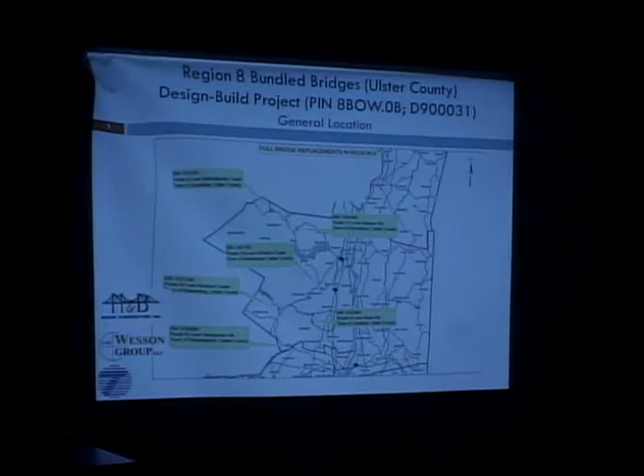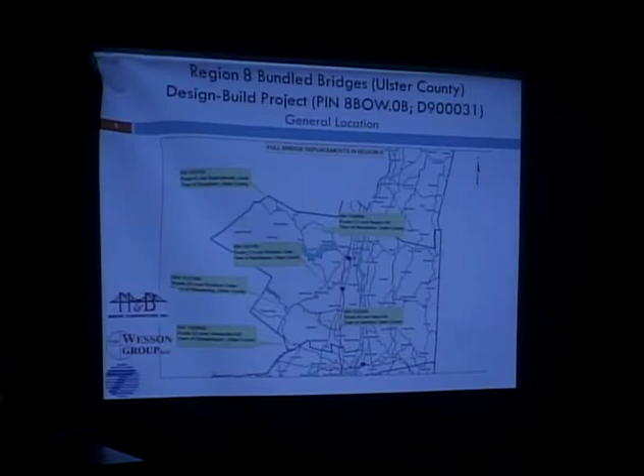You're right. Are you ready to start? Everybody ready? Yeah, we're ready. With the technology over this, there. Where should we stand, over here? You all right with the wire? Let me just, where do you need to go? Put that down.

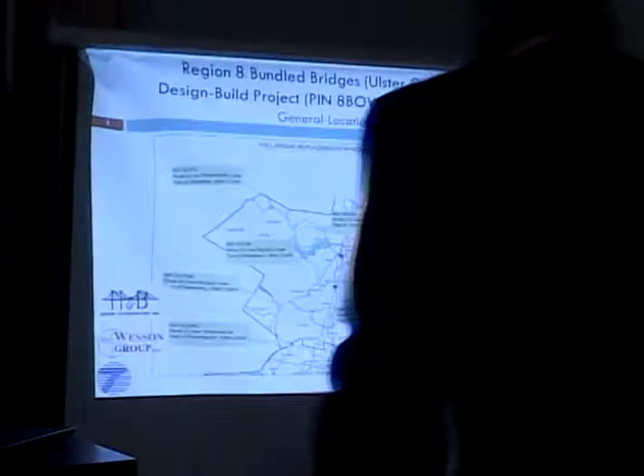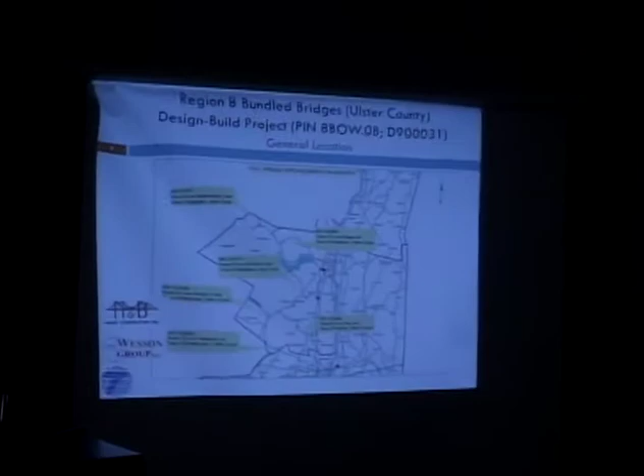All right, thank you everybody for coming to a short presentation about the project bridge replacement that we have going on.

In the town of Shandaken, very shortly here. My name is Paul Tierms, I'm with New York State Department of Transportation, and I am the project manager for the state on this project.

This project is a new type of contract, a new venture for New York State. Most of the contracts in the past, we have control over design. We put them out for low bid, and then we perform all the construction, inspection, and the quality assurance of the project.

This new type of project is a design-build project, where we put together a proposal of requirements for the bridge replacement - all requirements we want to be met in the design and the construction, from bridge design qualifications to work zone traffic control restrictions, and any special comments we've gotten in our initial public outreach from the community.

Then we put the proposal out to be proposed on, and we get one design builder, a contractor combination with a design firm and a construction inspection firm that provide all the services for New York State Department of Transportation. And they design the project, build the project, and they oversee their quality control over the project.

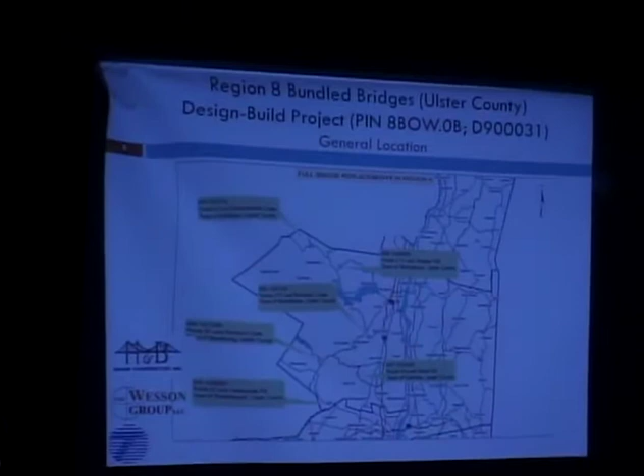It consists of 6 locations in Ulster County. Shandaken, in the upper northwest corner, is the one extreme, all the way to Pine Bush at the southern edge of Ulster County. So throughout the course of the next 18 months, we'll be reconstructing 6 bridges.

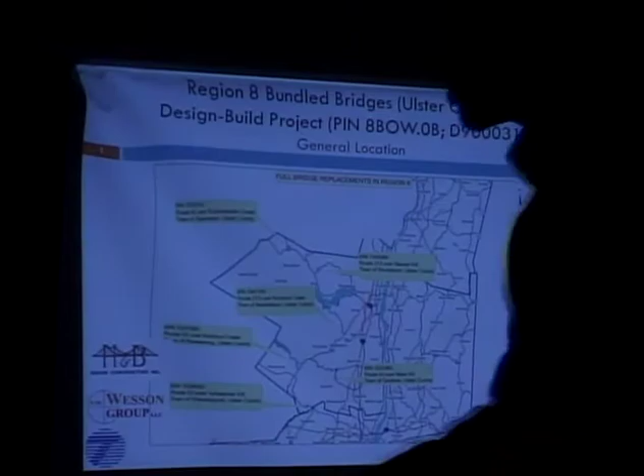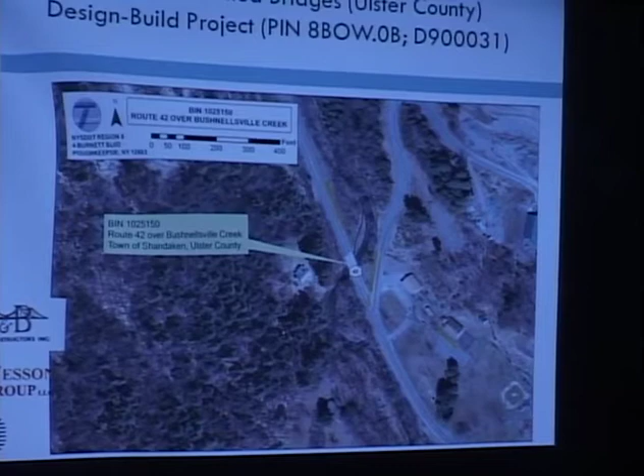So the first location happens to be here in Shandaken. It's Route 42 over Bushnellville Creek, just north of the 28 and 42 intersection, near the police department garage and the other town facilities.

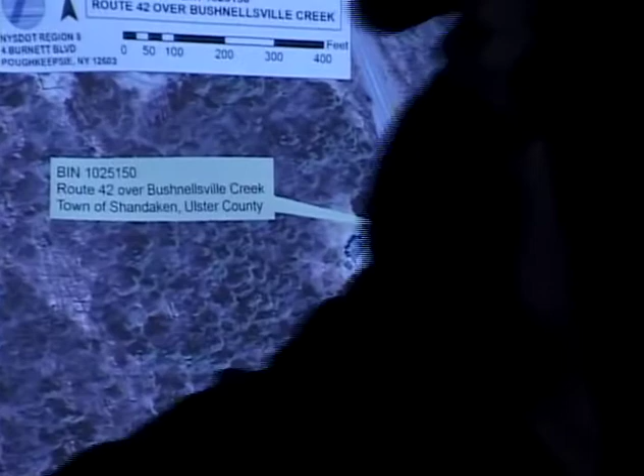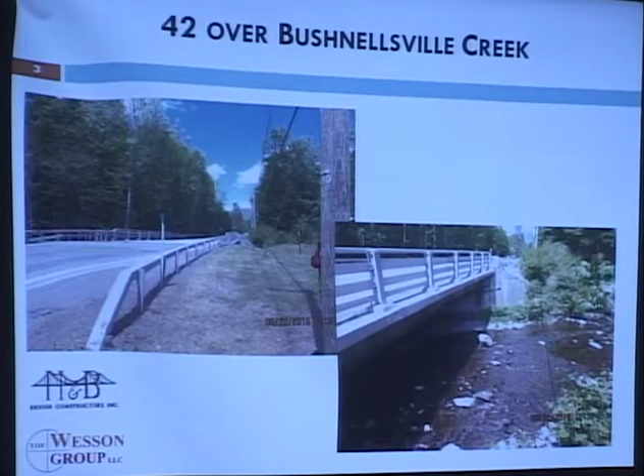So right now it's just sort of a plain Jane, vanilla fudge bridge. The state has identified these structures that may have problems in the future with scour-prone foundations, so this is on that list of so-called critical bridges over water. The plan is to replace the bridge in kind on its existing alignment, maybe with a little bit of higher elevation and a wider waterway opening to address the flooding concerns and erosion issues around the existing bridge.

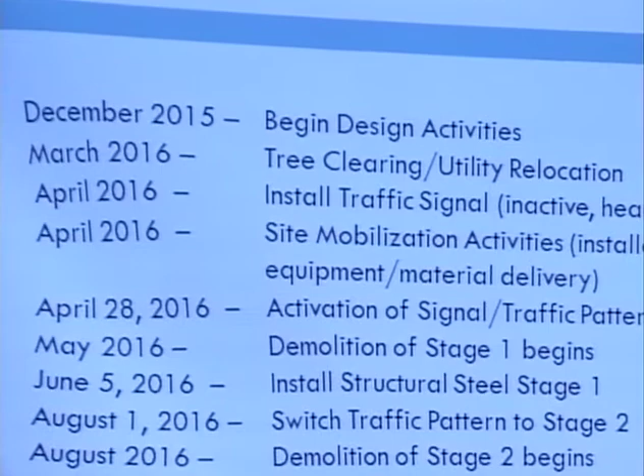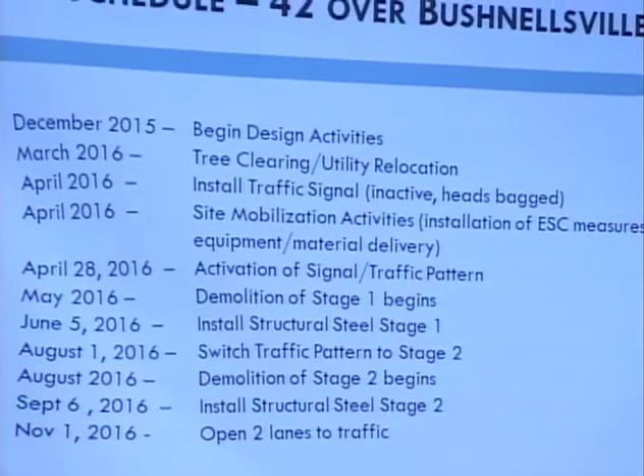As far as our schedule goes, we were awarded the project in December, so right away we had to begin our design activities. It's a design-build project, so there were no plans, so designing the new bridge and the roadway was the first task. In March, we started some tree clearing - you probably saw some of that activity going on - and utilities relocated to get themselves out of the way.

The next piece of activity you'll see in April, towards the end of the month, will be the installation of a traffic signal. That will be part of our work zone plan. We'll have an alternating one-way traffic pattern. You'll see the signal go up, and for the first couple of weeks, the heads will be covered up. They'll be bagged until we determine it's okay to put them in operation.

Also in April, there'll be some other site mobilization activities. We'll be moving some equipment in, doing erosion and sediment control device installation, bringing some materials in. Then the plan is on the 28th of April, we'd activate the signal, and that would control traffic.

in a one lane alternating direction pattern. Once the road is closed, we would demolish half of the bridge at a time. What's now the western half of the bridge will be removed and replaced first. That activity will start in May. Sometime in June, new structural steel will arrive and we'll continue on.

By the 1st of August, we should have the first half done, and we'll switch the traffic pattern so you'll drive on the new part and we'll do the second half, more or less the same procedure. Structural steel will come in September. The plan is that by the 1st of November, we'd be open back up to 2 lanes of traffic.

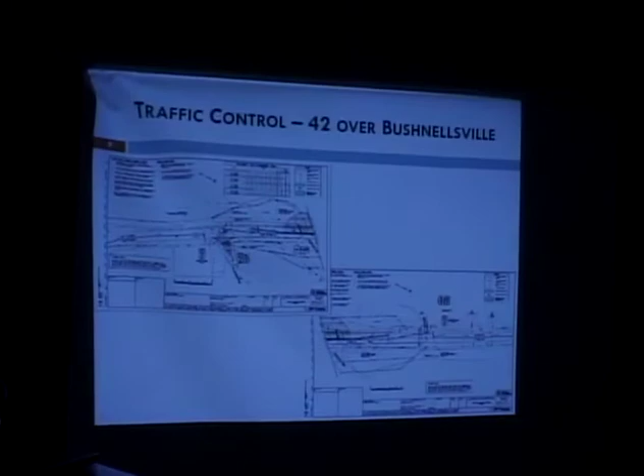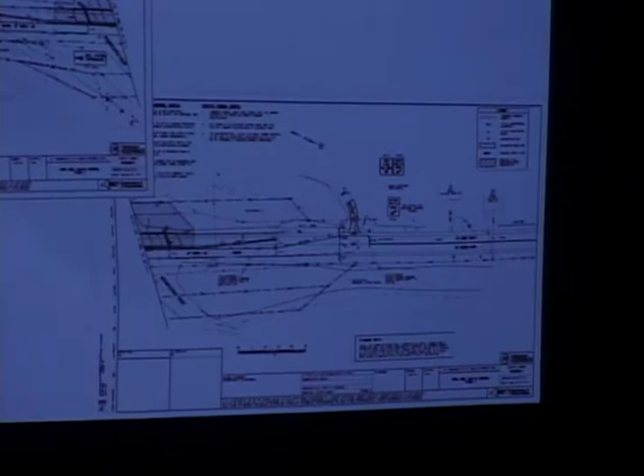As far as traffic control, it's going to be a signalized one lane, two direction arrangement. So you wait, the signal will give you a green light. We've got a couple of driveways there, one to the town facility that will have its own signal face. If you're in there trying to get out, there'll be a detector that'll give you a green light to advance. Similarly, on the north side, there's a driveway right where our signal is, so those people will have either a push button or a detector, so they'll get a signal phase to proceed.

One of the things we're doing as part of this design build process is a lot of public outreach that is normally not done on these kinds of projects. To date, we've had a stakeholder meeting where we met with some town officials and other people in the locality, school officials and whatnot who might be most directly affected. This public information meeting is this forum here, where now it's just a general forum to the public, an opportunity to see and ask any questions.

Also, there'll be a postcard mailing that will go out to all the residents in the zip codes. In a week or two, you'll see a little postcard come with the pertinent information about the project, so anybody who's not here and not watching on television will get a little notification that the project is happening. Also, the DOT maintains a website and their 511 service, which will have project information on it, and it's also going to be monitored by the Regional Traffic Management Center, so they're aware of lane closures and coordination with emergency services.

That's it in a nutshell. If there's any questions, feel free to shout them out. We've got some plans here on the poster boards that maybe you can come look at, just showing what the replacement bridge will look like. It's more or less a very simple project from a bridge construction standpoint. We're just here to make sure everybody's questions are answered.

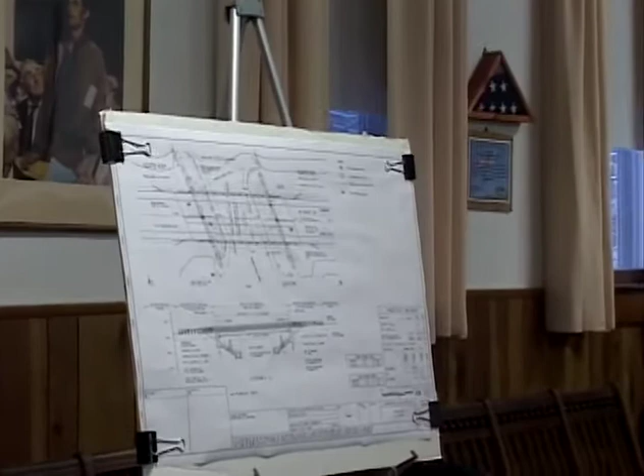Are you going to realign that bridge or swing it downstream a little more? The alignment will be right on, the center line will stay as it is now. So in the end, the bridge will be a little higher and a little wider. The hydraulic opening will get wider, probably by about 20 to 25 feet, but it will be the same alignment. So it's 20 feet wider, longer too. From the side, it'll be wider, but longer as far as the bridge is concerned.

That's already been washed down to the footings, you know. Yeah, part of the construction will be installation of foundation piles, 75 to 80 feet deep, I understand, that will help with the scour prevention. And these will be armored with heavy stone fill.

This project here, all 6 bridges, is a FEMA-funded project, and all bridges are ones that have been marked by FEMA as funded on state highways for one of two reasons: scour protection, which is a big one on this one, and increasing the hydraulic opening to prevent damage from future flooding, like from Hurricane Irene or things that went through this area in the recent past. So that's one of the big requirements that we put in our proposal, requirements of their job in designing the structure.

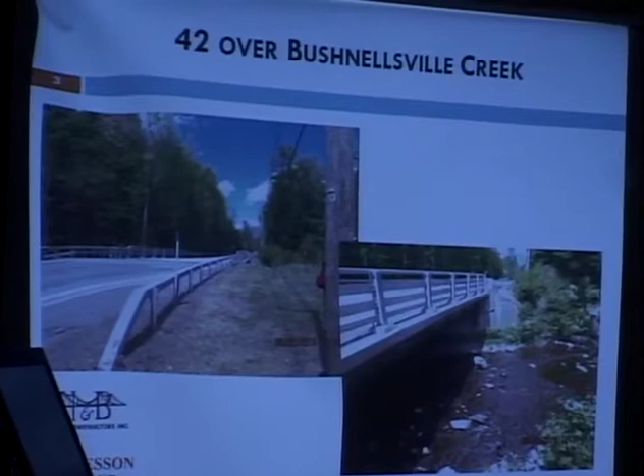The new bridge will have a 5-foot shoulder on each side of the bridge. I don't know off the top of my head if that's currently what's out there - it's 3.5 or 4 feet, so I'd say 8 inches or a foot wider on each side.

So for this bridge and the others you're designing and building, after it's done, will you be filing the necessary paperwork to update the flood insurance rate maps? In other words, if it's going to have greater capacity, will the flood maps change and might that affect some residents? Maybe not at this one.

Overall, part of the requirements of hydraulic design is no rise in the flow upstream or downstream of the structure. That was part of the design Harrison and Burroughs engineers had to take into consideration with their hydraulic and structural design, and we did have to meet that. So there will be no remapping as a result of this project.

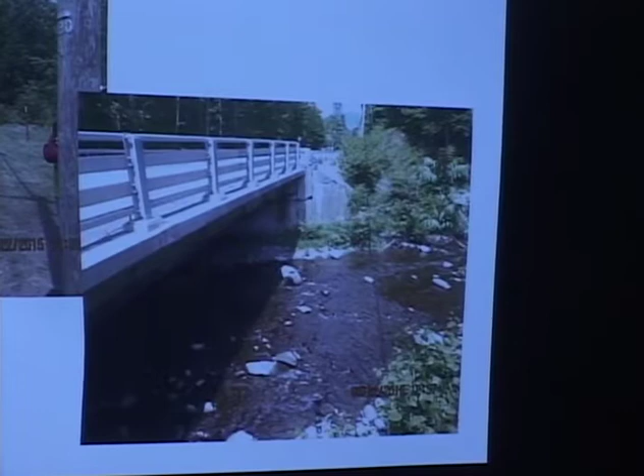Didn't you say you're going to widen the creek? The opening of the bridge - if you look at the picture on the lower right, you can see the far abutment. The new abutments will be behind that, and there'll be a slope from more or less the existing stream bottom back up to the new abutment. So the stream channel itself will remain more or less untouched.

What happens with these bridges is when the water rises, there's debris in the streams and it becomes almost a dam. So you get two things: damage to the structure, and potential blockage there. So we're really raising it above that water elevation.

If there's any questions, go look at the Bridge Street one in Phoenicia, because that moved from the floods - from impact, yeah, all the debris. It's a touchy situation because, as the gentleman said, we're not really allowed to impact the flood elevation. We can't do anything that would constrict the flow or allow more water to pass downstream, because there would be cascading damages elsewhere.

So how about bridges that have been filled in underneath with an abnormal amount of gravel over the years - are they going to take that back to where the stream beds were, or leave it the way it is now? We're matching the existing stream bed elevations, what's out there today.

In that bridge you are, but there are other bridges where you're not - like the Big Indian bridge. The Big Indian, I think the department has coming out under similar design-build contracts, scheduled for probably 2017 or 2018 construction. That's under different project management staff, but I believe the stream bed is basically staying the same through there also. I do know parts of that project - it's a much more complex engineering situation than here.

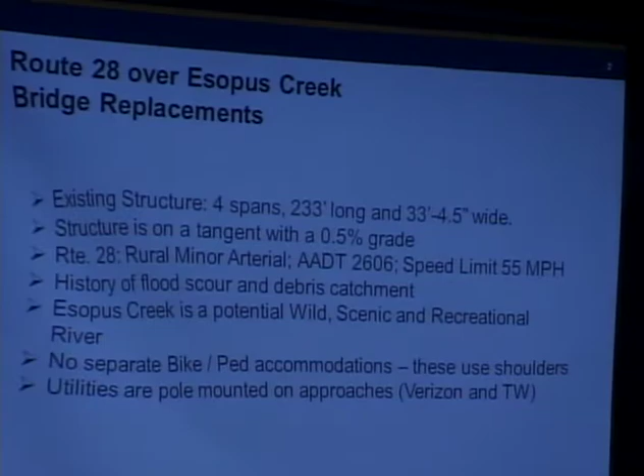Let's start with the existing structure. It's a four-span bridge with box beams, total length 233 feet, width 33 feet 4.5 inches. The structure is on a tangent with a 0.5% grade, in a rural location, with an ADT of 2600. The bridge is actually a debris catcher, a scour situation, and the stream below is considered a potential wild, scenic and recreational river. There's no accommodation for pedestrians; they have to use the shoulders.

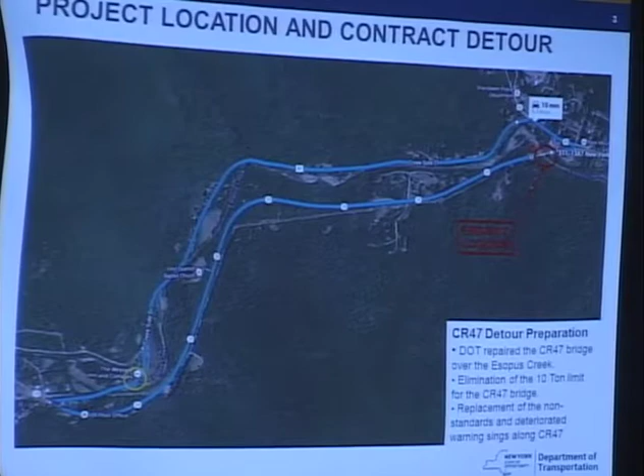This is the detour we'll use while crossing is closed, approximately a 6.3 mile detour. To put traffic on County Road 47, we have to do some minor repairs, including repairing the bearings of the existing structure that carries County Road 47 over the Esopus Creek, near Firehouse Road. That small bridge was having an issue with the bearings, so we replaced them, which eliminates the 10-ton weight limit the bridge had.

That weight posting has already been eliminated. We're also asking the contractor, in this contract, to remove all the non-standard and deteriorated warning signs along the whole of County Road 47. This is part of the minor repair needed to accommodate the 2,600 vehicles average on that county road. So, as mentioned, it's about 6.3 miles, approximately 10 minutes to go around from abutment to abutment.

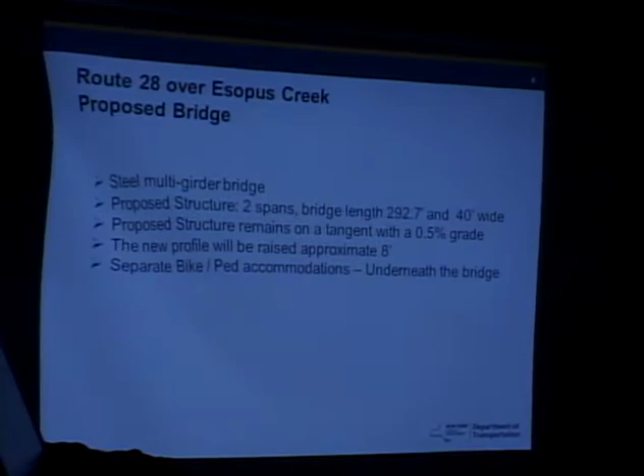This is an aerial view of Route 28 over the Esopus Creek. The proposed structure will be a multi-girder bridge, 8 feet higher than the existing bridge, remaining on the same tangent and center alignment. The big change is eliminating the 4 spans, going to 2 spans with a single pier in the middle, which eliminates the piers that catch debris coming down the stream. It will also be a little longer, almost 293 feet, and a little wider, 40 feet.

As I mentioned, it's going to remain in the same tangent, same proposed 0.5 grade. One of the new things is the county has future plans for that railroad crossing at Route 28. They are proposing a trail in that location in the future, so they requested if we can accommodate that crossing.

For safety reasons, we studied that, and the best approach was to have the crossing under the bridge. So there's going to be a concrete pad, a concrete trail, under the bridge, connecting both sides to the rails. I can show you that in this plan.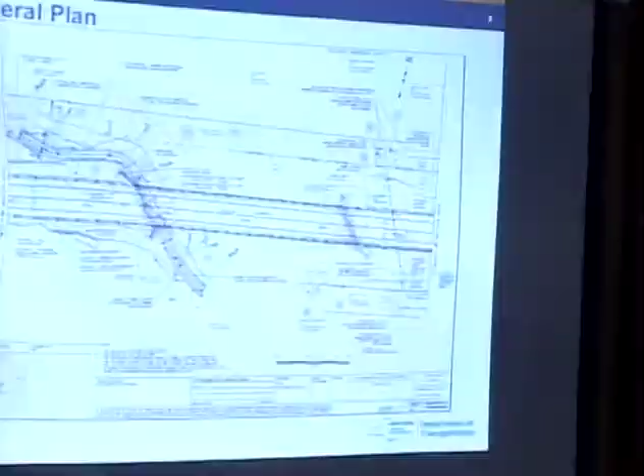You can see there, that's where the trail goes. Underneath the bridge it's going to be 10 feet wide on concrete, and away from the bridge it's going to be 8 feet wide, connecting both sides to the existing railroad. This is for the future—the county will come over and finish that project, but for this contract we will already provide that.

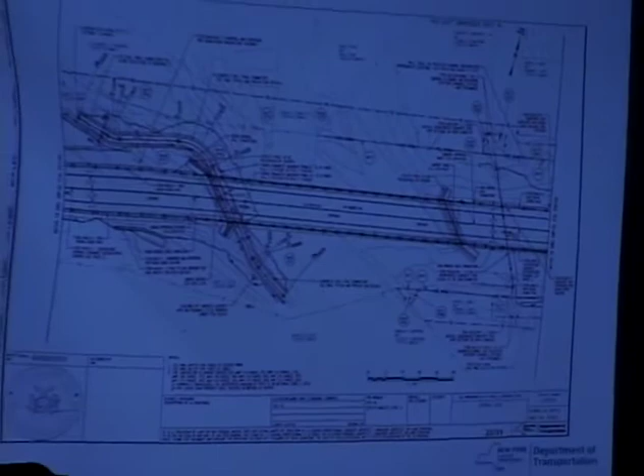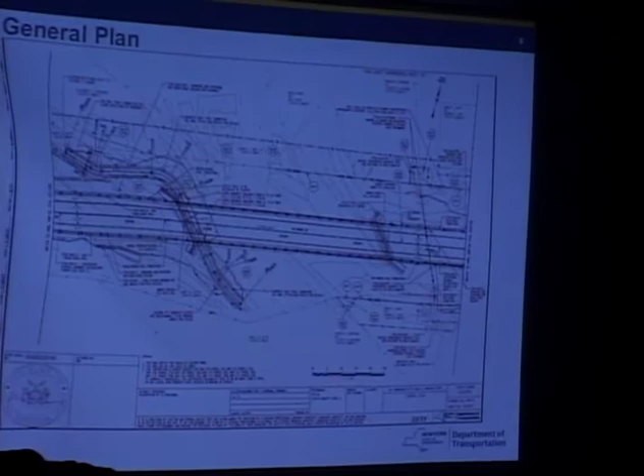Is the bridge going to go over the railroad, over the tracks? The trail is underneath the bridge, so the bridge is actually going to go higher and farther over. The bridge is going to be 8 feet higher than the existing one. So this is what we have there.

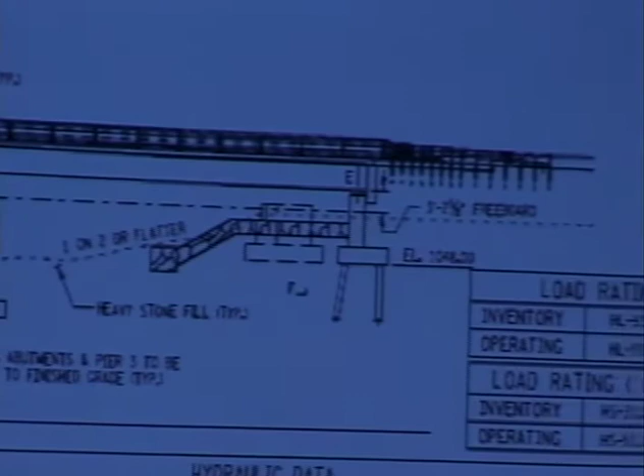The piers—let's go to the next one. So we've got piers again, and the pier in the center is going to be supported on piles to prevent scour issues. That's the same as the pier to the abutment on the right. The abutment to the left has no piles because we've got rock there, so there isn't enough room and no need to put in piles.

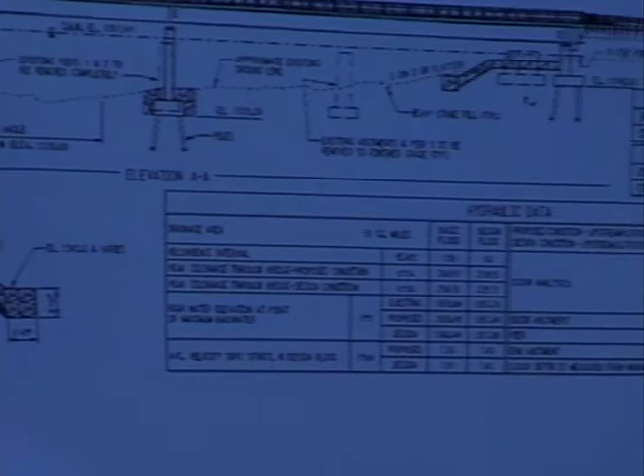So this is the profile of the bridge, and at the bottom there's a detail. On the left abutment you can see where the new trail is going to be, just next to the abutment, underneath the bridge, underneath the girders. This is going to be a jointless bridge, which will be long-lasting because there won't be issues with leakage or salt damaging the girders. This bridge is estimated to last at least 75 years.

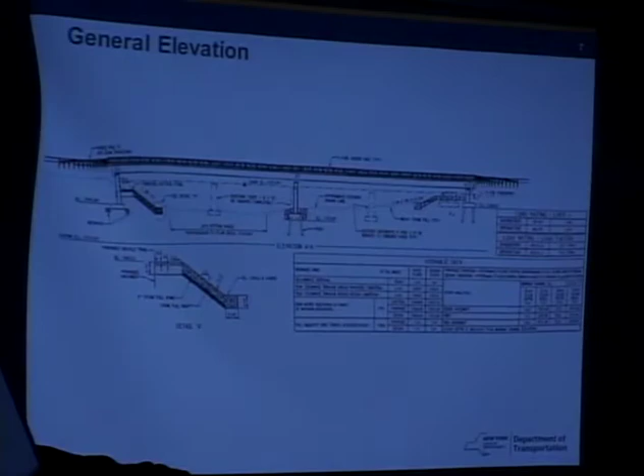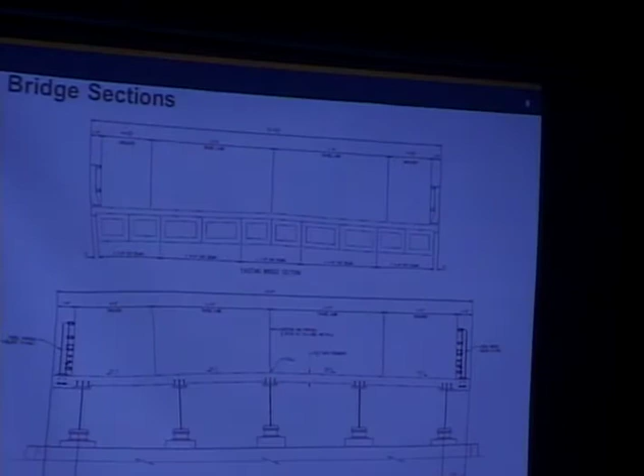This is the typical sections. The one at the top is the existing bridge, which is concrete box beams. The one on the bottom is the proposed, a little bit wider, with 8-foot shoulders on both sides for pedestrians or bikes on the bridge itself.

How far upstream will they clean out the islands that are in the stream now—there weren't there before, they were left after the flood. Some of it was cleaned out and some wasn't. How far upstream will they clean those islands out to make it one stream instead of two like it is now?

We cannot go into the stream and start removing material. What we're doing is just eliminating the existing piers and putting in new ones. There is a levee in that location—we are not touching that levee at all, so it's going to remain there.

Yeah, but from the levee down to where the bridge is, that's where all the debris lays. I mean, the DOT's jurisdiction is the maintenance of the bridge and replacing the bridge—that's really the DEC's area. So we're spending millions of dollars to protect the fish? No, I think we're fixing a bridge that has scour vulnerability.

In the last Hurricane Irene, the water was up to the road level there. I think you're getting a new structure that will last through storms and shouldn't need to be replaced for the next 100 years. This bridge was built in the 50s and it's near the end of its life. Yes, sir.

Yeah, a couple things. The gravel that's underneath these bridges—you have to take that gravel out, otherwise you're just going to put them up higher, 8 feet higher, 10 feet. Go over to Europe and look at the bridges over there—500 to 1,000 year bridges.